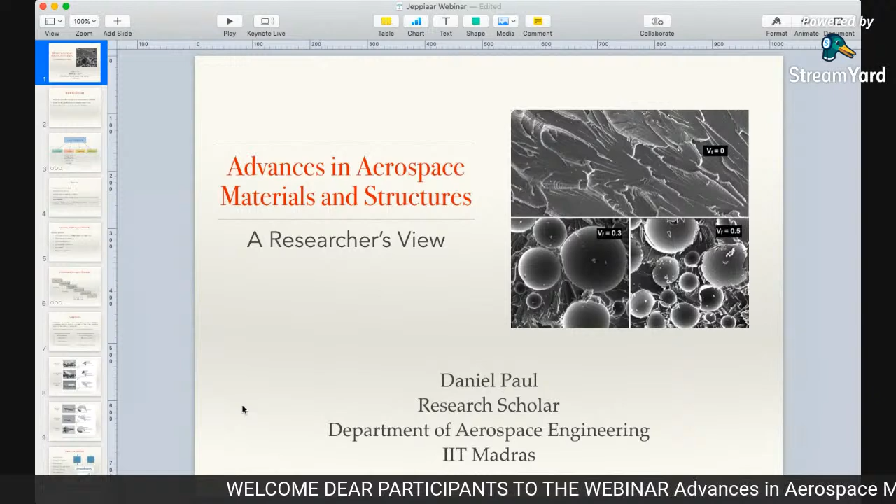I welcome all of you, thank you for taking your time. Today I would like to share a bit about the advances in aerospace materials and structures from a researcher's point of view. So it's not going to be a lot of technical stuff. It's going to be a lot of my experience, which I went through during my PhD, especially to inculcate an interest in research.

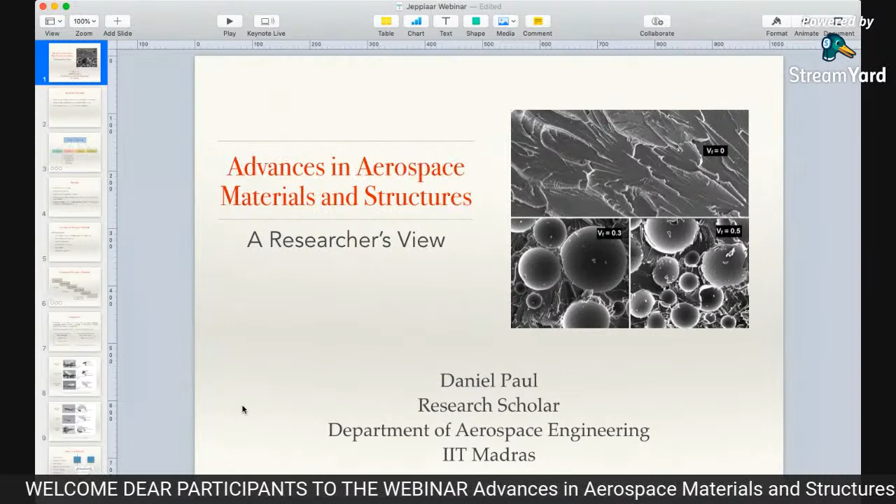As Sir has already introduced, I'm Daniel Paul, a research scholar at the Department of Aerospace Engineering in IIT Madras. The aim of this webinar today will be to provide a brief introduction to aerospace materials and structures. It will be very brief. Many of you might already be knowing about these materials and structures used in aerospace and other applications.

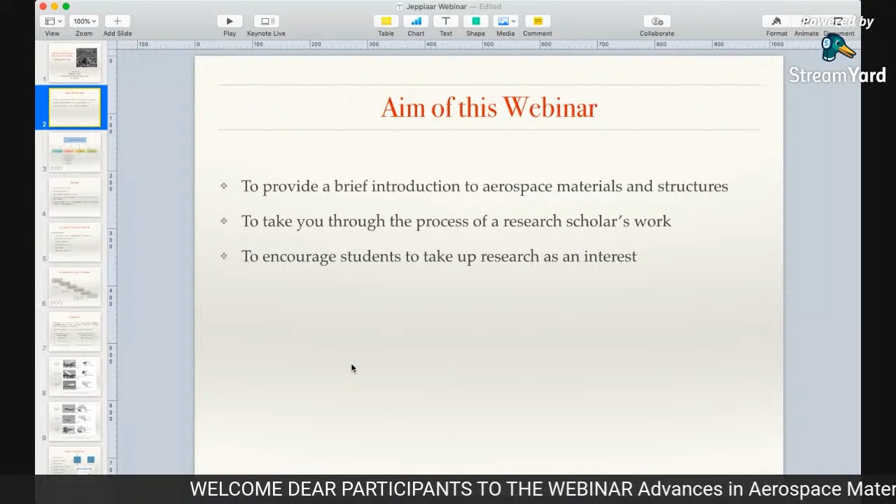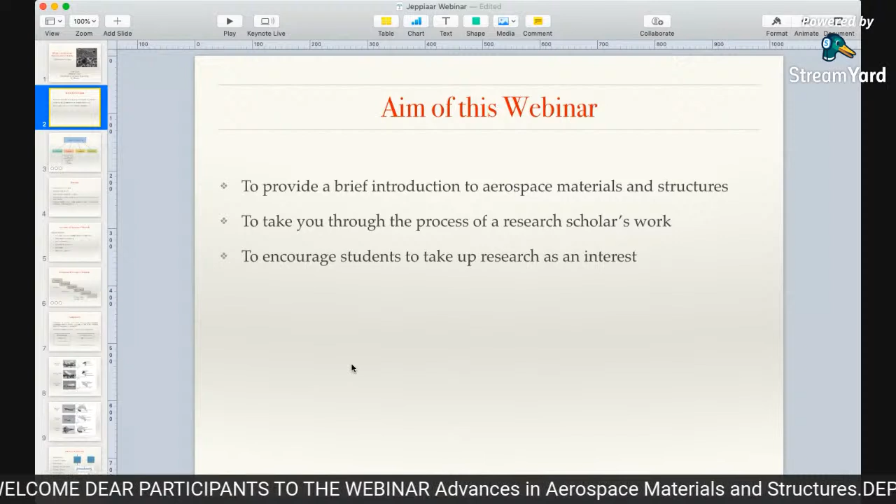The second part is mainly to take you through the process of a research scholar's work, that is, how to approach research and what are the important steps in research. It'll be good if undergraduate or postgraduate students inculcate that now itself. And the third thing is to encourage students to take up research as an interest. It may not be as an academic career, but as an interest, how to take up research in day-to-day, in the daily studies itself.

As we know, even yesterday there was a webinar on shock tubes. Aerospace engineering has several disciplines under it, and three are very major: aerodynamics, structures, and propulsion. Aerodynamics, as you know, deals with the forces on the aircraft when it is in flight. It can be an aircraft, a spacecraft, or any flying object.

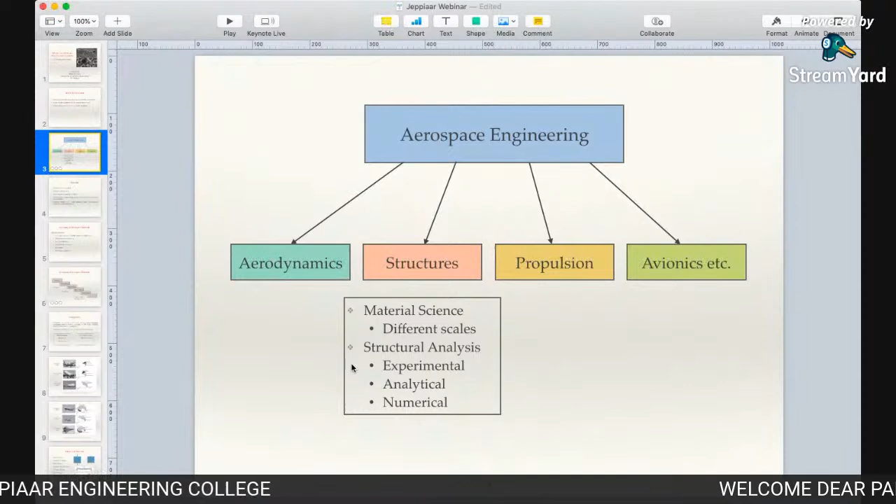Structures deals with the structural design, and what keeps the structure together. And propulsion deals with what powers the aircraft, spacecraft, space shuttle, or any flying object—what is that thrust-providing device. There are other sections of aerospace engineering, such as avionics, but that comes more towards the electronic section. So aerodynamics, structures, and propulsion are the three major pillars of aerospace engineering.

So today we'll be seeing about structures, and in structures there are two main classifications, or two main divisions.

One is material science, and the other is structural analysis. In material science, we deal directly with the material itself. If it is a metal, we deal with the structure of the metal. We deal with what are the constituents. If it's an alloy, we deal with what are the constituents of the alloy and how they react with each other. And there are different scales to it.

We can look at it at a macro scale, which is nothing but how we see objects to the naked eye. We can analyze these materials in a macro scale. It can be in a micro scale, nano scale, all the way down to atomistic scales and atomistic models of different materials.

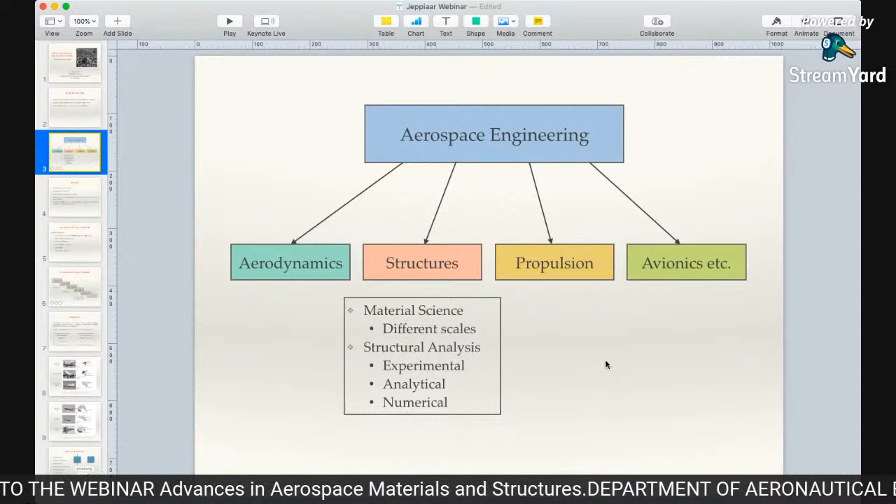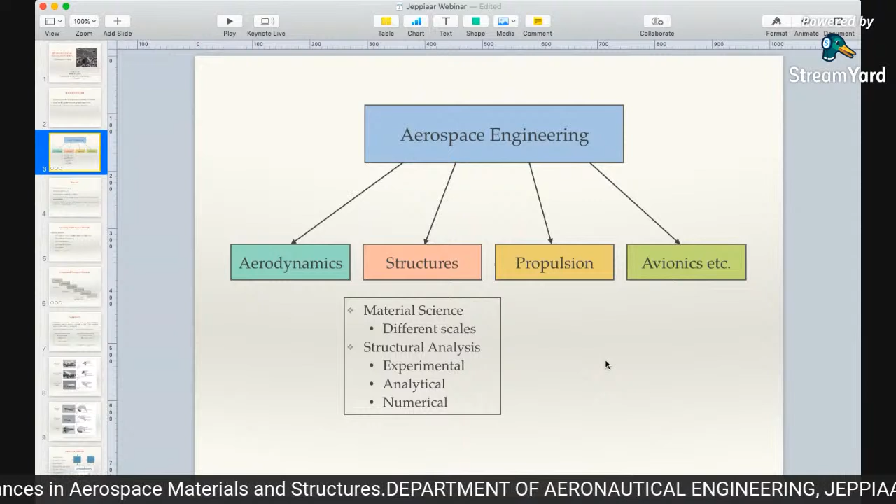And the other is structural analysis. In structural analysis, it deals with the design of the structure, how things are joined together, and what are the shapes which are used in the different load carrying members. Structural analysis can be either through conducting experiments, through analytical models, and also, in recent years, a lot of research is being done on numerical simulations. So we need not actually make a structure and test it physically, but we can run numerical simulations which tell us which is the best possible configuration and which is the optimized structure.

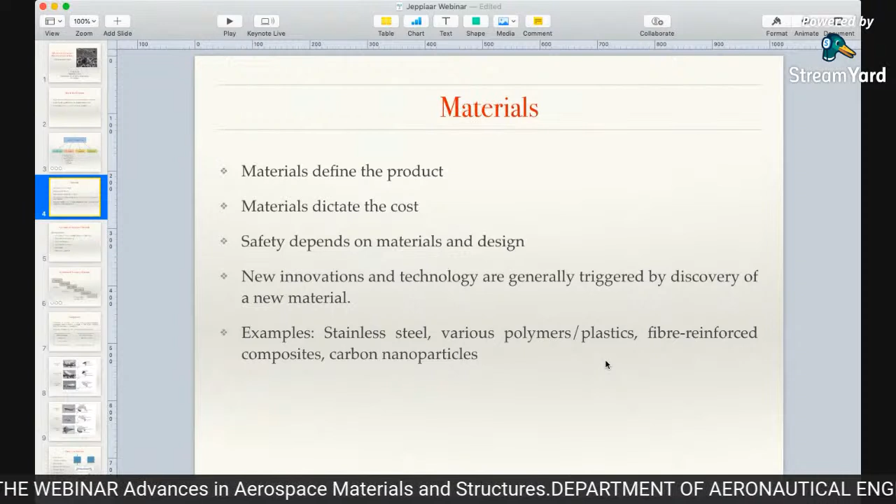Now coming to materials. In general, when we see any product, the first thing that we look for is the material. For example, if we buy a mobile phone or a laptop or any other device, the first thing that we see is what is the material. Is it made of some cheap plastic material, or is it made of some very good material which can withstand stresses if it's dropped? And we see the glass, whether it has some extra coatings to protect the material, protect the product.

So materials define the product. If we take a product, the first thing that we see is the material which it is made out of. And the second thing about materials is that materials dictate the cost. You cannot have a very high performance material at a very low cost. So depending on what is the expected cost, the materials are decided in different structures. That is an important parameter.

But this cannot be done at the expense of safety. Safety is primary, especially in the aerospace industry. Safety is one of the most important parameters, not only in aerospace, in everything, but more in aerospace. Because when an aircraft or a spacecraft is flying, and if something happens because of the material, some material erodes or some damage happens, it can be catastrophic and fatal, completely fatal. So safety depends completely on the materials and design of the structure. Materials need to be chosen very carefully in aerospace industry.

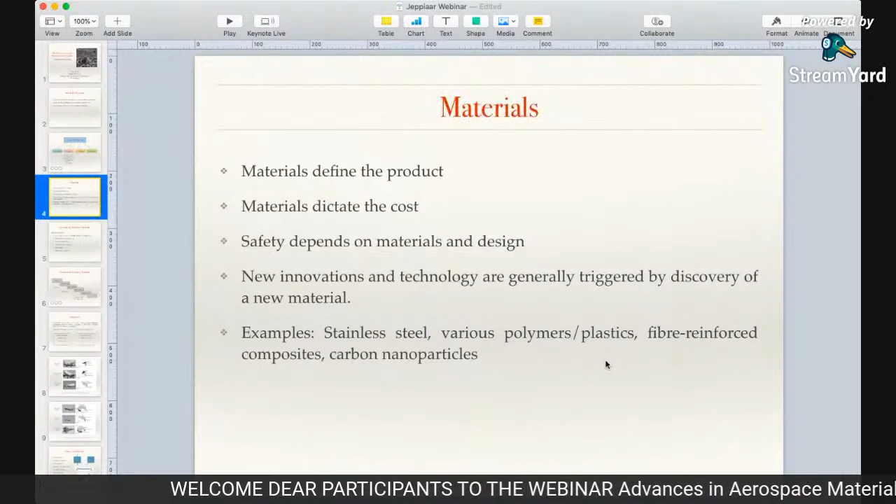And another important fact is that all new innovations and technology are generally triggered by the discovery of some new material or some new way of looking at an existing material. For example, if we see the Industrial Revolution, a lot of metals came into prominence in that time, and that led to a lot of industry development. People could manufacture things very easily. New tools could be made. New industrial equipment could be made very easily because of discovery of how to easily make things with metals.

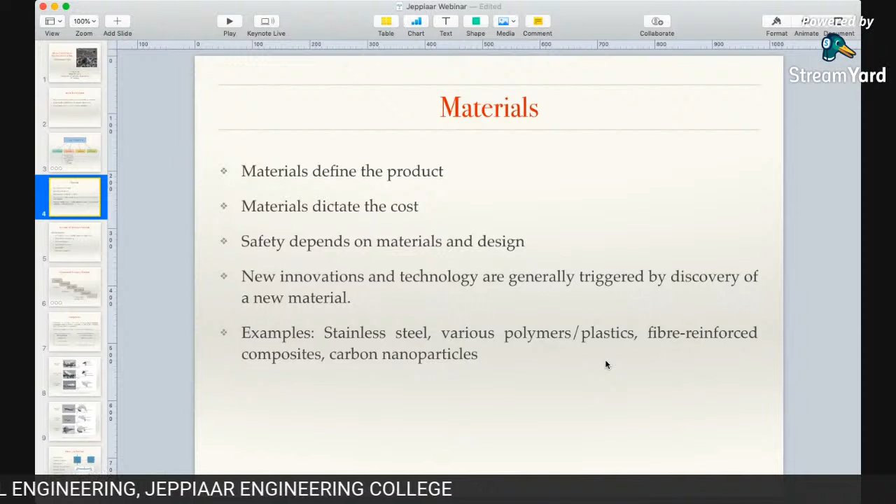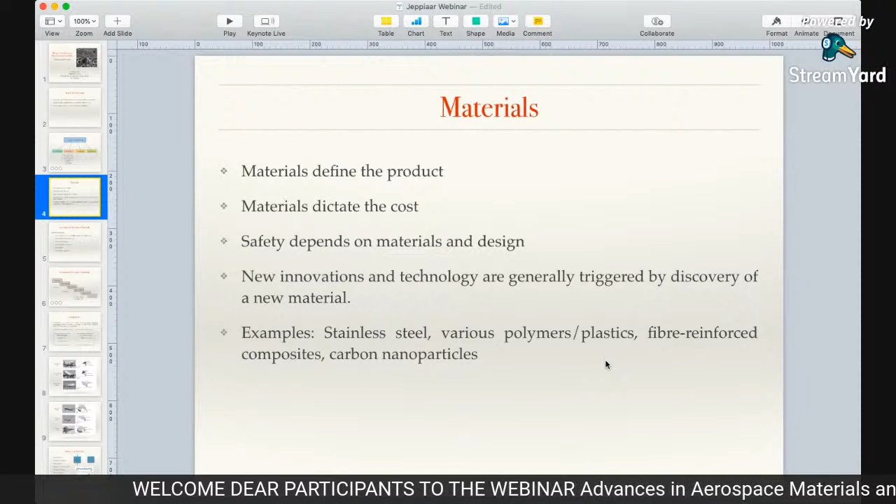Stainless steel and iron, steel, and all these things came into prominence during that time. And various polymers, plastics, which we use today, 50 years back, it would not have been there. And the progress that material has brought is immense. Coming further down, we see composites, advent of composites in the middle 20th century, late 20th century, has been revolutionary in many places. The same way, carbon nanoparticles, nanotubes, nanostructures, nanopowders, all these have been game changing in many different industries. And also, if we see the computer era, it came when they found silicon diodes, and when they found that they could reduce the size of different big integrated chips into smaller ones. So that also was possible only because of the discovery of materials and processing.

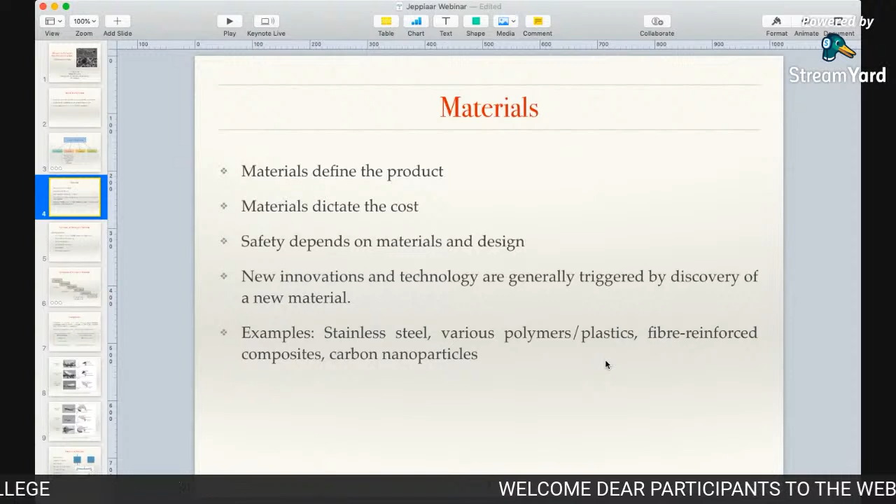So what is so different in aerospace materials, which makes them a level above other materials, other requirements of other industry? The necessary properties of aerospace materials, if we see them, the first thing would be low weight. We never want a bulky object to be flying in space, because to make it fly, we need to supply it more lift or propulsion, and that again leads to more money being put in. So the cost increases rapidly. And at the same time, we cannot compromise on strength or stiffness or any other material mechanical property. So these aerospace materials should have a high strength to weight ratio.

Aerospace materials should have high strength at a low weight, which we generally don't get in metals. If we have a bigger, thicker metal structure, we think it will have more strength, but the aerospace industry needs materials of high strength and low weight.

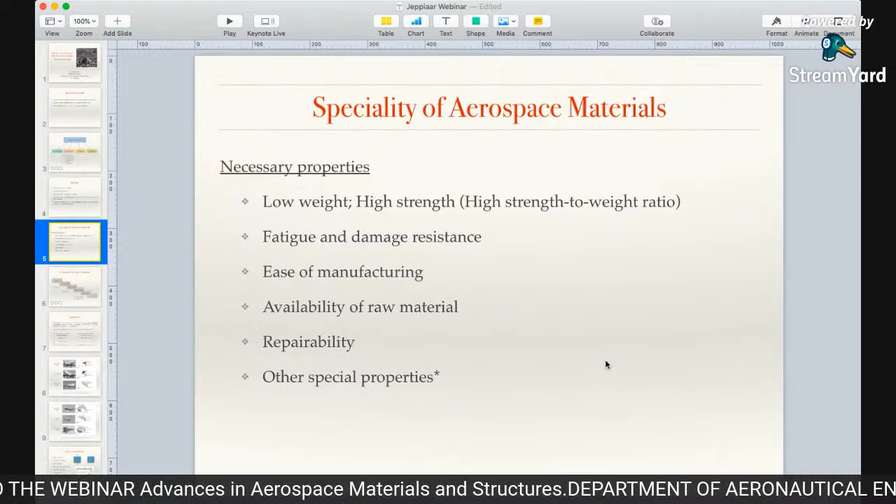Another important parameter in aerospace materials is fatigue and damage resistance. When an aircraft or spacecraft is on the ground, it has no loads other than gravity, so the stresses are very low. But when it is flying through the air, it experiences large aerodynamic forces, drag, and many other extra loads which are very high. So the stresses fluctuate: low on the ground, very high in operation.

This fluctuating cyclic load causes fatigue, which is very dangerous because it develops with time. There may be a small crack at some point which is not visible, but suddenly when it exceeds the fatigue stress, it can catastrophically fail. This is very, very bad in the aerospace industry, so materials that are fatigue and damage resistant are a key requirement.

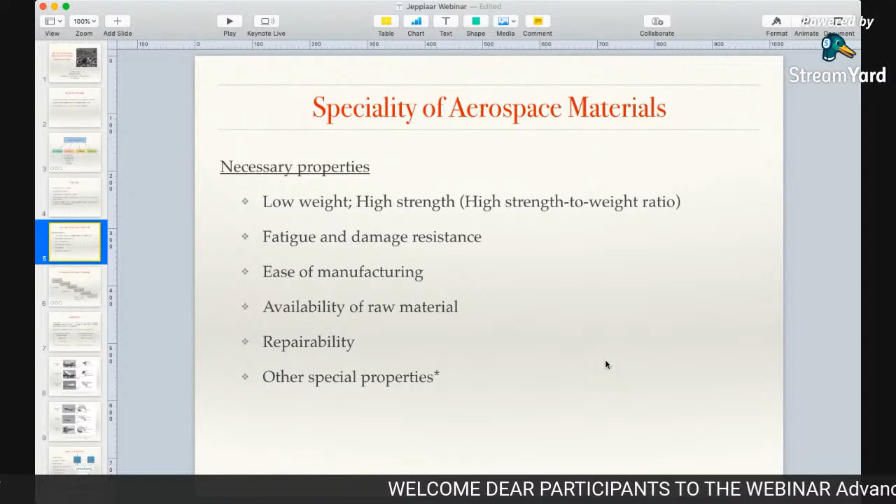Ease of manufacturing and availability of raw material are very important for commercial flight applications. For military or space applications it may not be a problem, but for commercial flights or other applications like drones or unmanned aerial vehicles, ease of manufacturing and raw material availability are very important. Another important factor is repairability.

If a small panel is damaged, that should not hinder us or force us to replace an entire body, structure, or part of the aircraft. So these materials should be easily repairable—if there's a defect, it should be easily fixed and the part can go back into operation.

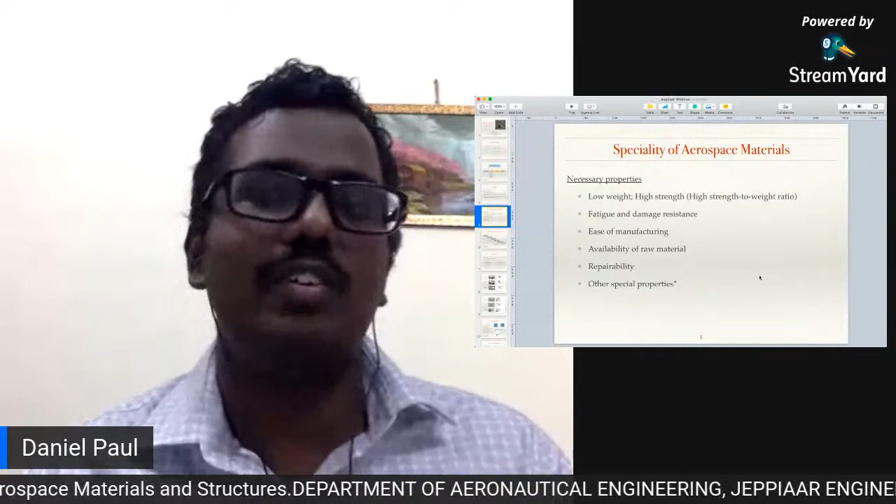There are other special properties too, such as heat resistance. Some materials used in hot areas of engines need to be very resistant to high temperature. Also, spacecraft returning from space hurtle towards earth at very high velocity, generating friction and heat. So heat resistant materials and tiles are very important in the aerospace industry.

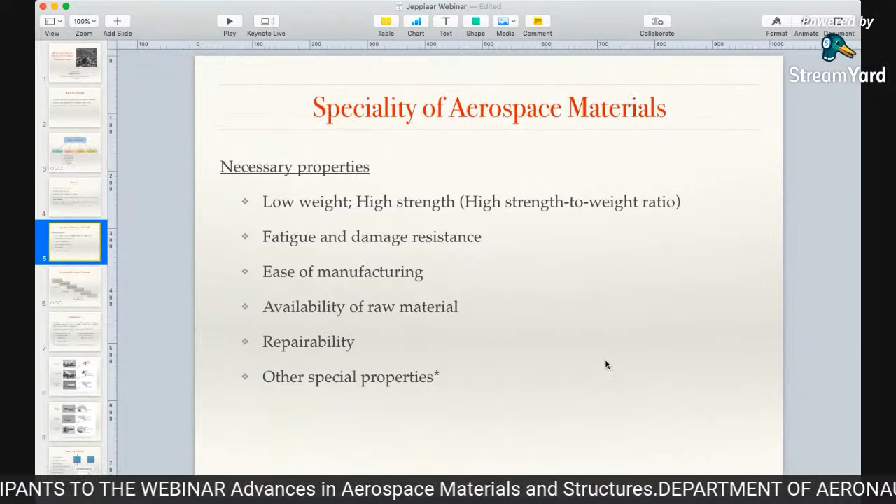Another special property that may be required in certain applications is electrical conductivity or insulation, as needed.

Looking at the evolution of aerospace materials, the first flights towards the late 19th century were basically gliders, not powered flight. Towards the beginning of the 20th century, all aircraft were made of wood or a small amount of metals. The first powered flight in human history, in 1903 by the Wright brothers, was made basically with wood and some reinforcing material.

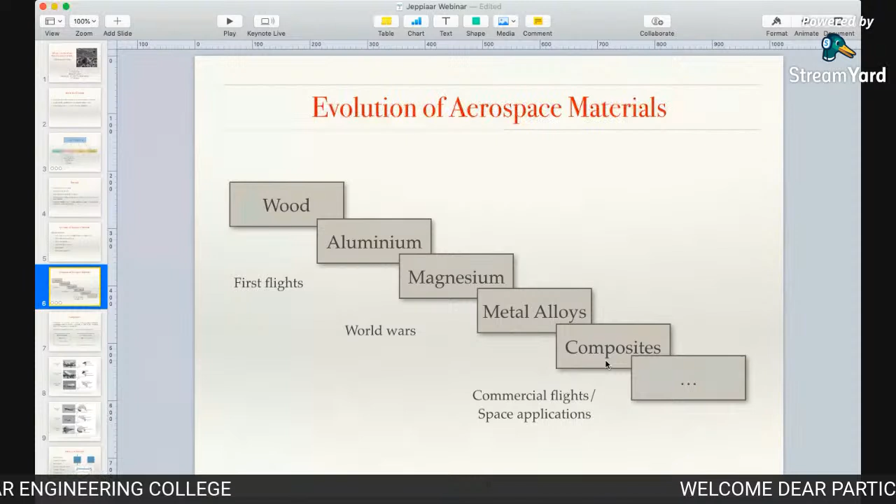Even until the World Wars, in the mid-20th century, wood was still used—there are fighter planes from the World Wars made completely of wood. But then, due to industrial development, we stepped into metals. The main metal found to be light and comparatively cheap was aluminium, and aluminium, magnesium, and even titanium began to be used in some applications during the World Wars.

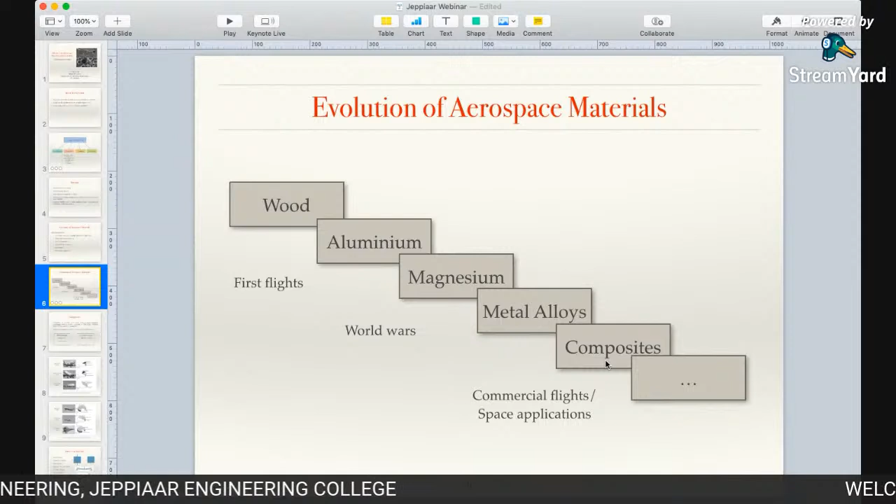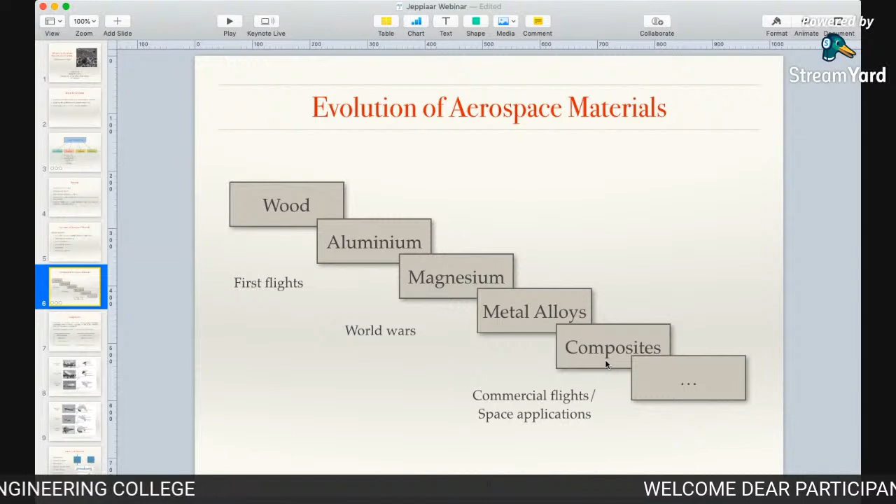Coming to the second half of the 20th century, commercial flights and space applications took off. People started sending spacecraft, rockets, and missiles into space, and for this they needed very strong materials—metals alone could not withstand that much temperature or load. So metal alloys like titanium alloys and aluminum alloys came into use, which led to the discovery of a very important class of materials called composites.

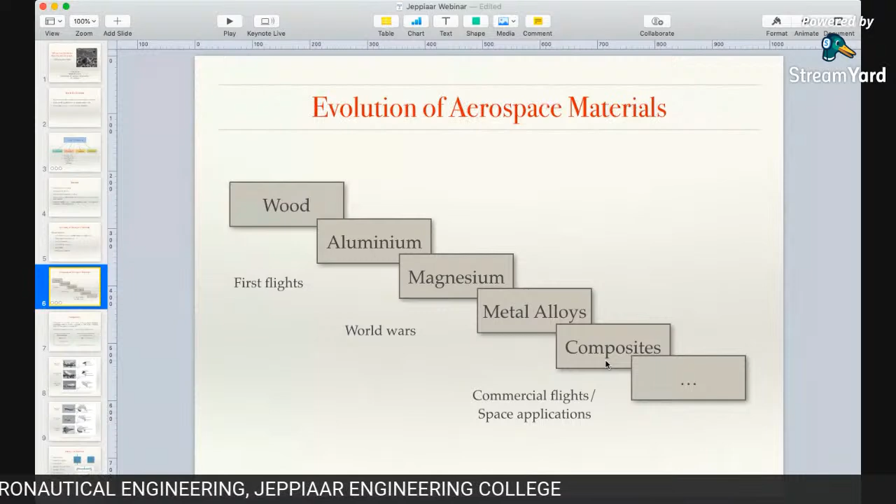Today, most of the talk will encompass composites and not much of metals. So I'd like to take a small diversion from the history and define composites. Most of you would have heard of composites, especially those in second, third, or fourth year of UG or PG. Composites are material systems consisting of two or more individual constituents put together and combined physically, not chemically—that's an important point to note.

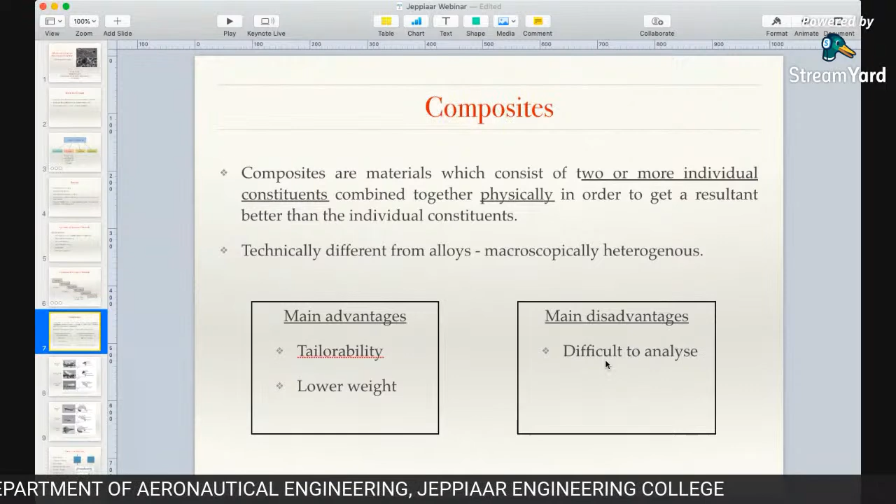This is done in order to get a resultant system which is better than the individual constituents. So you may ask, what is the difference between alloys and composites? Alloys are usually metal-based compounds which are combined at a micro level or even lower. So when we see it at a macro scale, or with the naked eye, it just seems like a homogeneous material. For example, brass or some aluminum alloys.

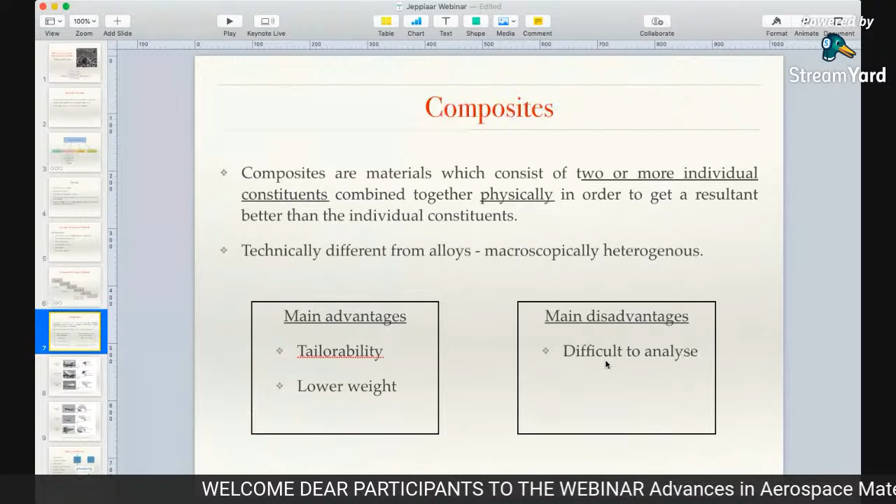But composites, on the other hand, are macroscopically heterogeneous. That is, when we look at it with the naked eye, or if you cut a cross section of it, you can physically see the different constituents. So the constituents don't chemically react completely with each other and form a different phase. The two or more individual constituents are in different phases in composite materials.

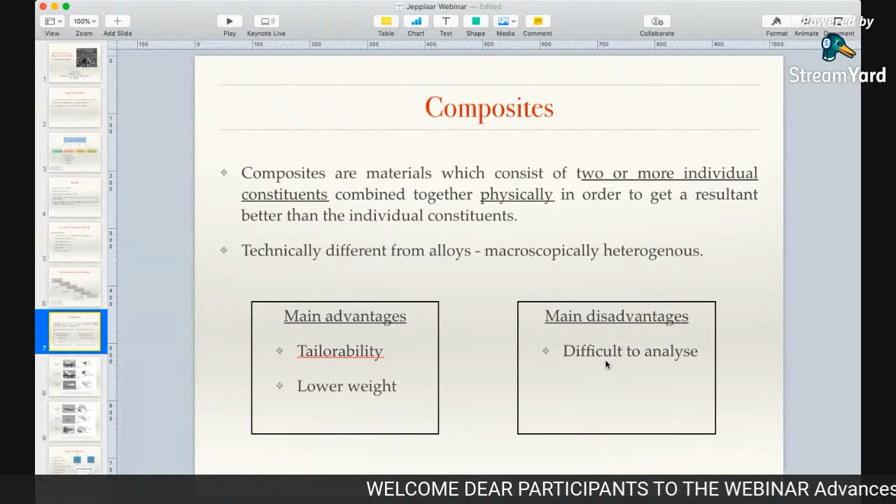So compared to metals, what are the advantages of composites? Composites are easily tailorable. That is, you can change these constituents in their structure, or the way they are put together, or the proportion of different constituents, to give different properties that we need. Also, in general, composites are lower in weight compared to metals. There are some alloys which are very light, but in general, compared to metals and metal alloys, composites have a lower weight.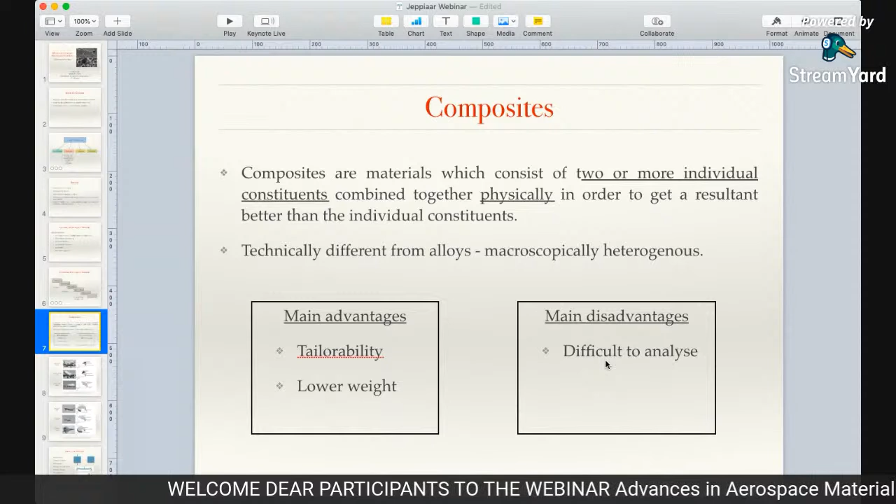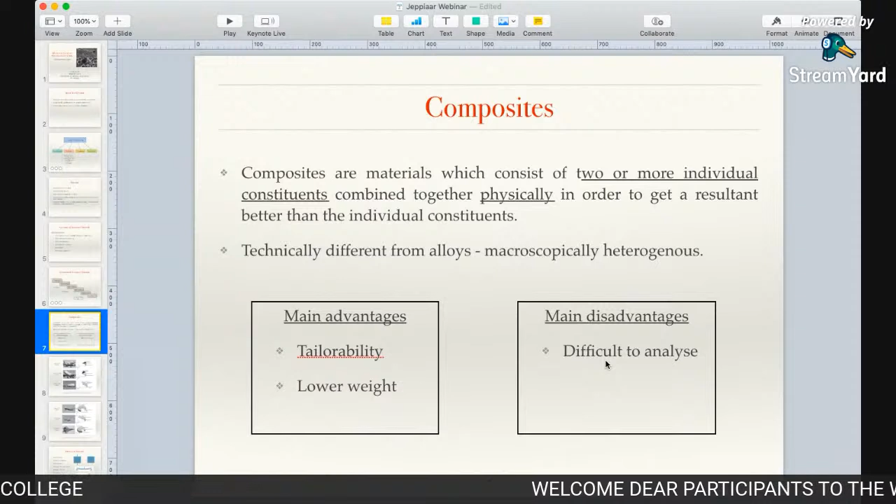A possible disadvantage of composites compared to metals is that it is difficult to analyze - not experimentally, but with analytical models or numerical simulations - because it has more constituents put together and it is not homogeneous. So it requires a bit of mathematics, a lot of analytical models, difficult models, in order to explain composites and understand their behavior without doing experiments. But in recent years, there is a lot of research being done on the numerical simulation of composites.

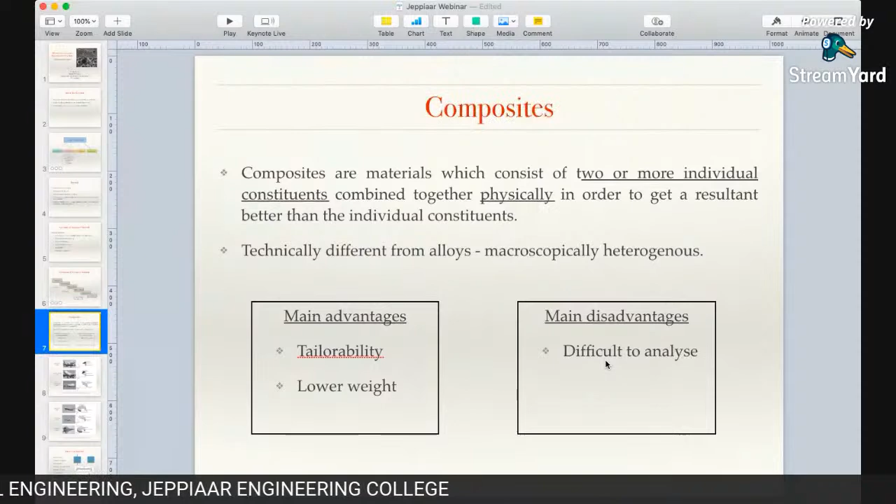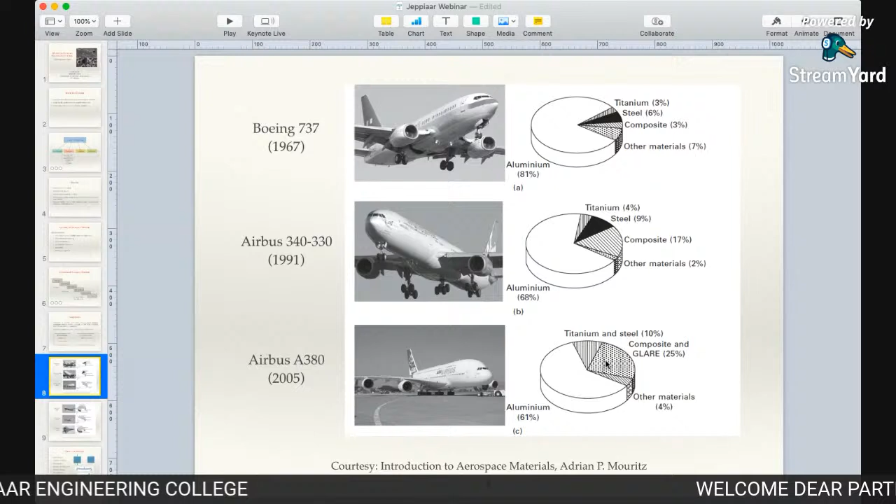Coming back to some trends in history - in this slide, what I want you to notice is the proportions on the right of aluminium and other metals compared with composites. So around 1967, when passenger flights took prominence, the Boeing 737 had around 81% aluminum by weight in its structure and just 3% composites and other metals.

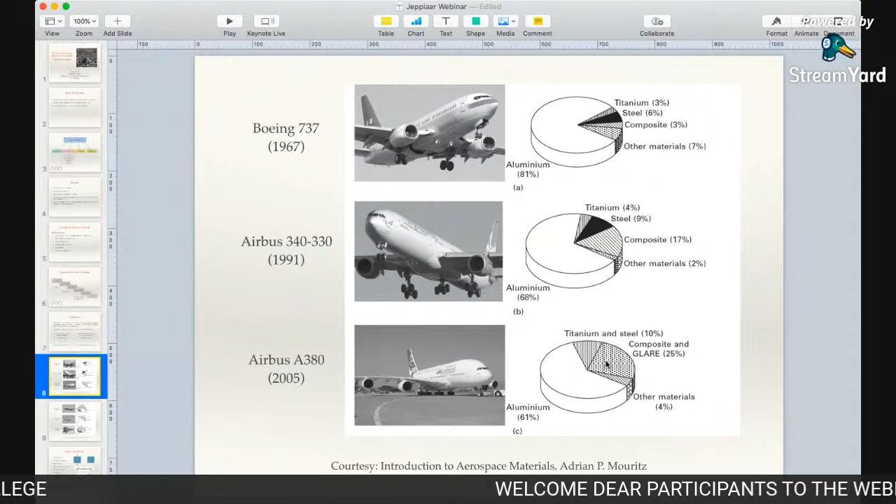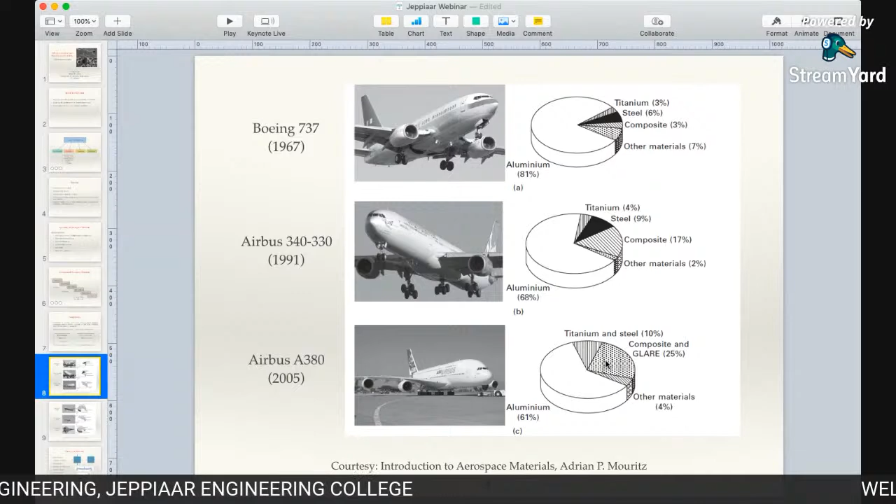Fast forward to 1991, the Airbus 340 had developed its composite proportion, but aluminum was still the major component. Coming down to 2005, composites were around 25% and aluminum around 61%. So composites were being researched on and coming into prominence. But by 2009, just 4 years after the Airbus A380, the Boeing 787 had 50% composite by weight and just 20% aluminum and other materials combined. This was a rapid change in the passenger or commercial flight industry.

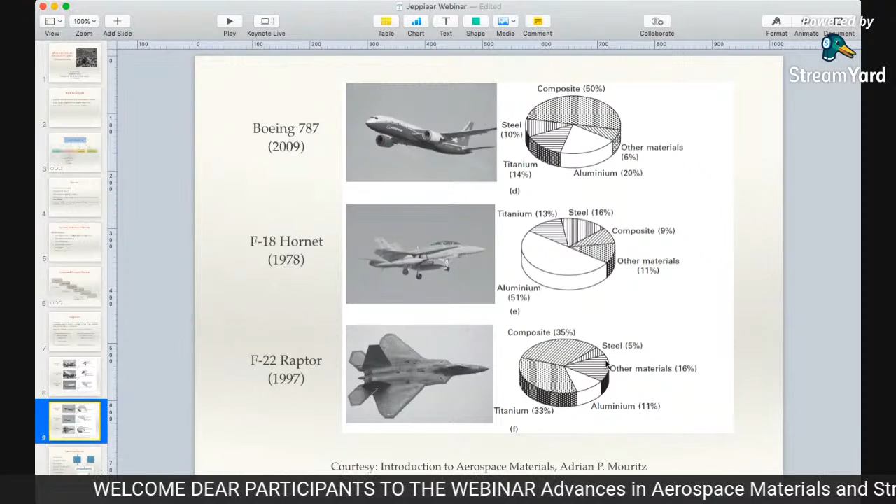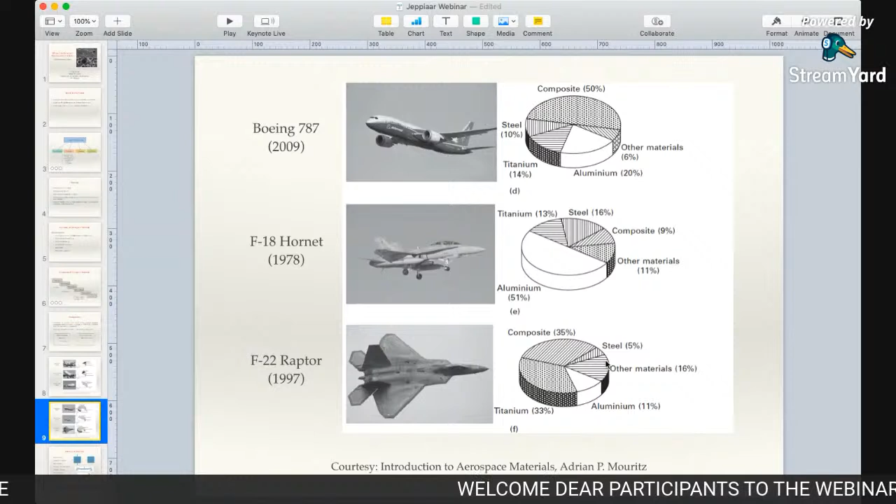In a similar fashion with military aircraft, in 1978 the F-18 Hornet had around 51% aluminum and just 9% composite. Fast forward to 1997, composites are 35%, titanium is 33%, and aluminum is just 11%. This is a drastic change, and it brought forward the advantages of using composites in the aerospace industry.

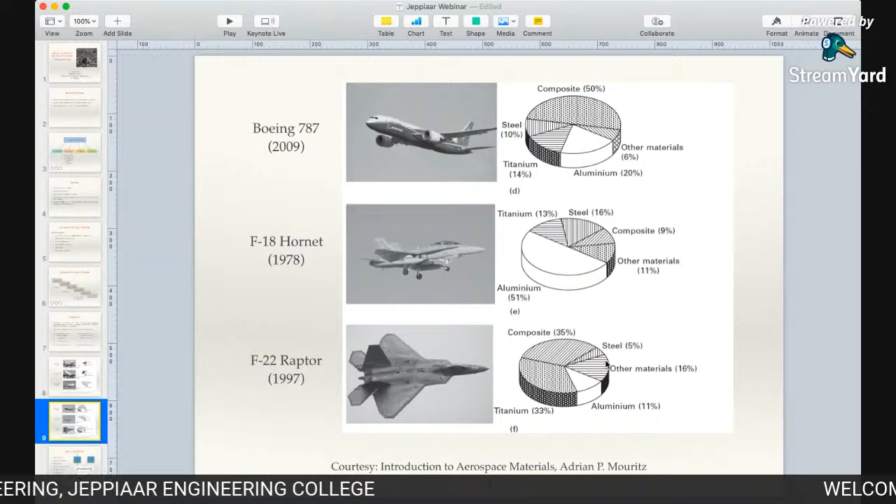So now we've seen the history of materials and what materials are used. I would like to take a small, one-slide look at stresses in materials.

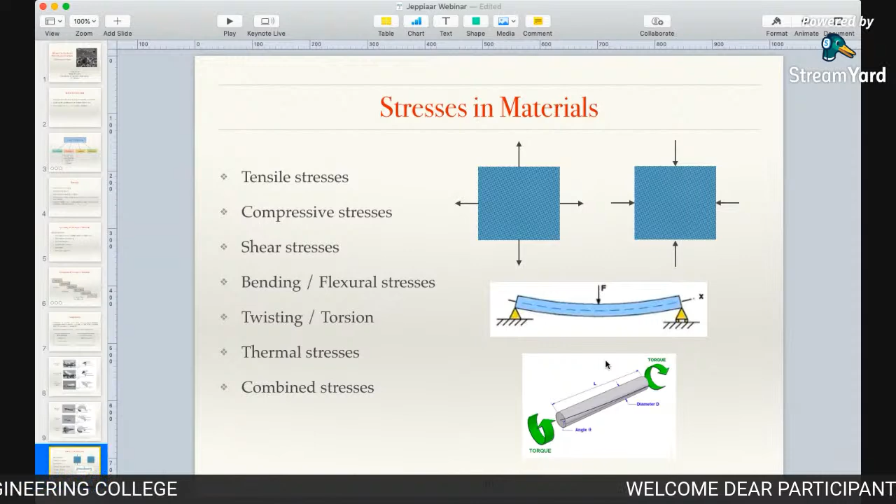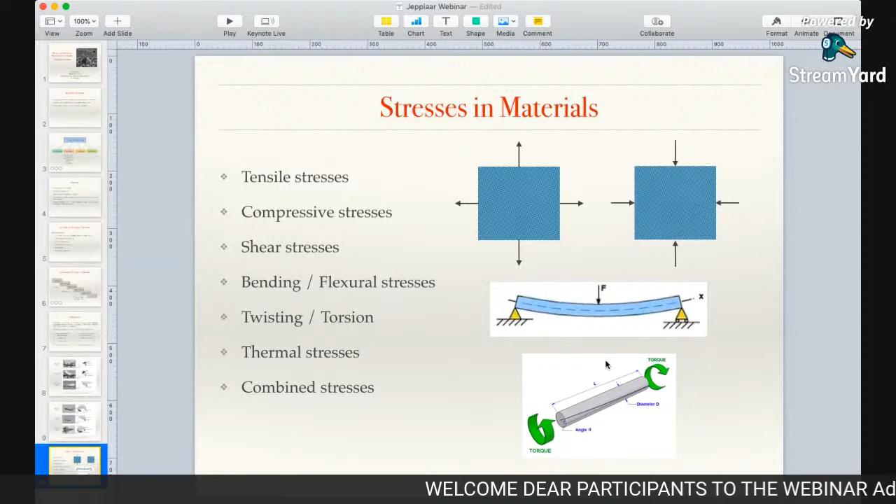When we look at different materials, say steel compared with rubber, we see a lot of differences. If you take a bar of steel and try to press it, it's hardly going to deform - it's just like a rigid material. But when you take a rubber piece, say an eraser, and apply a small force to it, it deforms a large amount. So we can say that steel is hard and rubber is soft.

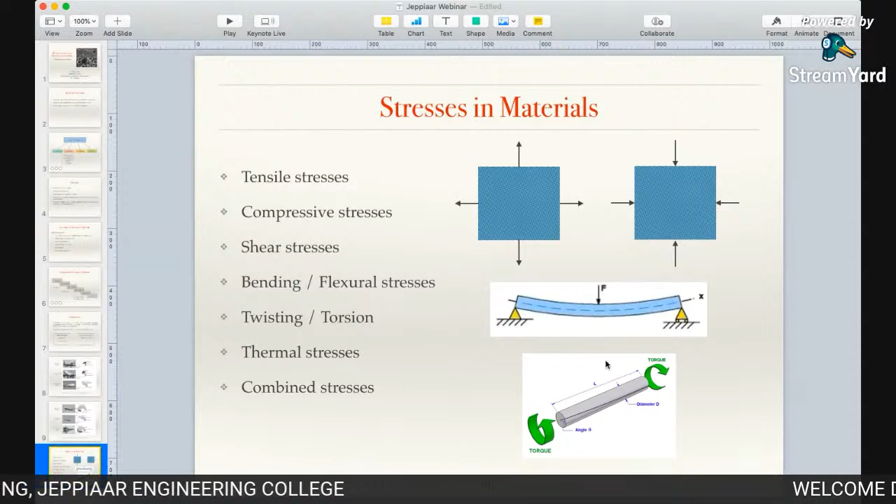Another property difference is that when steel is subjected to a very high load, it can deform, and when we take out the load, it mostly does not regain its original shape - it stays deformed. But when we see rubber, if we apply a load and then take it out, it's going to mostly come back to its original shape.

So why does steel react differently to rubber? What is the difference? The difference is that when we apply a loading or a deformation to a material, each point in the structure reacts to the loading, and this reaction is called stress. So stress is nothing but a reaction to the applied loading - it may be an external loading, internal loading, or many other types of loading.

So stresses are nothing but reactions of the material to a particular external or internal loading. There are different types of stresses, as we can see here.

The first figure on the right shows a tensile stress, which is something like an expansion. If a point in a material experiences tensile stress, that means that small infinitesimal portion of the material is being pulled apart.

Again, we have compressive stresses which compress the material. We have shear stresses, and we have bending which causes flexural stresses. That's the middle diagram here of a beam or a bar bending. We can see that the top half experiences compressive stresses and the bottom half experiences tensile stresses, so this is a combined tensile and compressive loading.

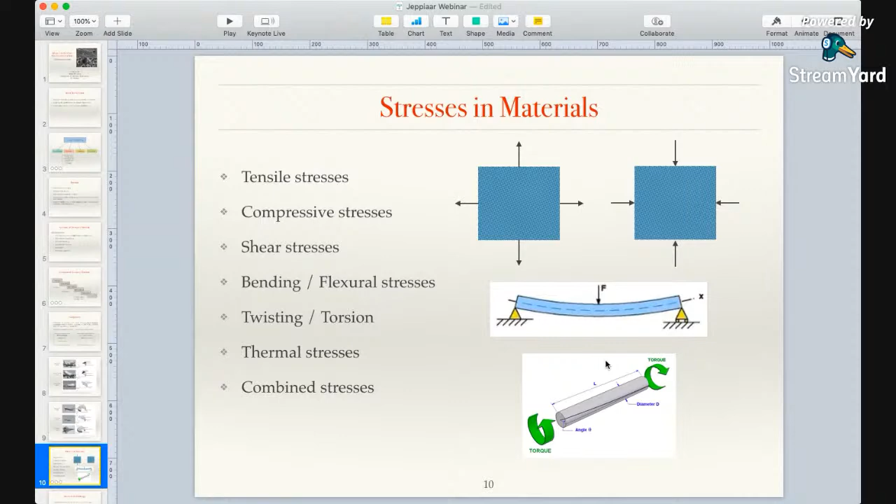In most aerospace applications, or any application, these stresses don't appear individually. In general random loading, you won't usually have tensile stresses alone or compressive stresses alone. Some parts of the structure may have tensile stress, some may have compressive stress or shear stress. So most of the time these stresses are combined in one way or another, and that makes it more difficult to analyze and to find out the exact reaction of the material.

So with this, I would like to move towards the second part of my talk today, which is about researching in aerospace structures.

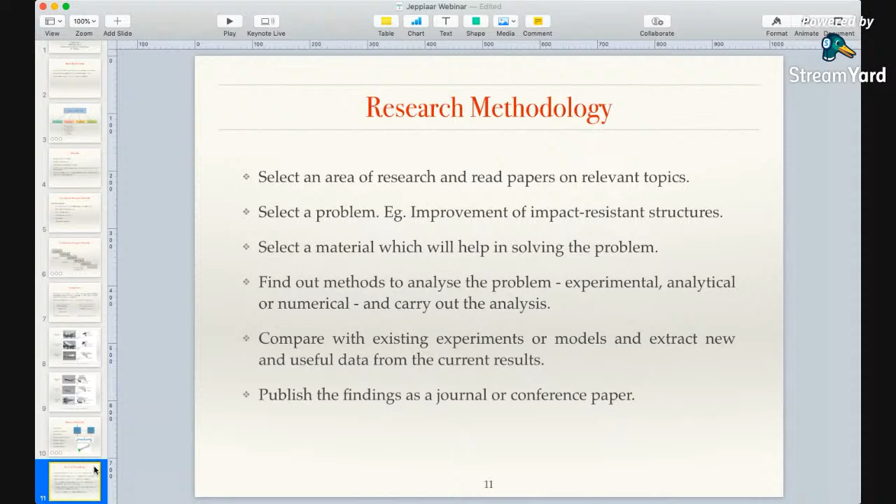This will mostly be my experience in the last 6 years in IIT Madras doing my integrated PhD program. When I went from UG to the integrated PhD program, my knowledge of research was not that high. So I'll tell you the steps that I took to improve my research capabilities, and I'll also go through my research work in brief to show you how to approach a problem, how to select a problem, approach it, and how to solve it and get results.

This is not an ordered list, this research methodology—just some important points to note when stepping into research. The first thing we do is select an area of research. It may be a broad area; in my case, it's composites. When I stepped into my integrated PhD, the topic given to me was composites, which is a very wide range of topics under it.

The first thing you do is not to directly start an experiment or do something, but to read papers on relevant topics under that broad area of research, to know what interests you and to know the current trend in that area.

The next thing would be to select a problem. From the papers you've read, you may think a particular thing can be researched further—there is a research gap in that topic. In my case, the problem I selected was improvement of impact resistant structures. Composites are good in impact resistance, but my aim was to find ways to improve the impact resistance of certain composite structures.

The next thing would be to select a material which will help solve the problem. From this point onwards, I will explain in the next few slides with examples how I selected a material and carried out the different steps in research.

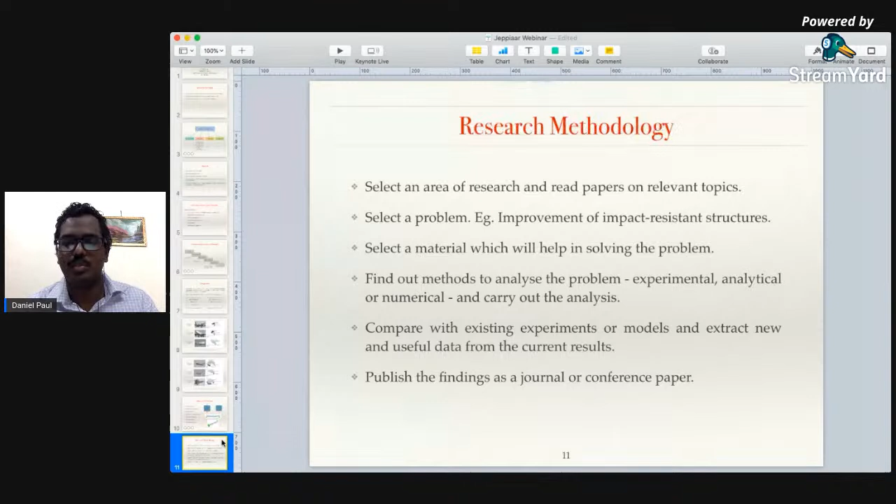So my broad area of research was composite material. As I've already introduced, composite materials' constituents can be broken down into two major parts.

The first thing is the matrix. The matrix is what gives shape to the composite material. It is a base which gives shape and structure to the composite material, and it also holds the other constituents together. Without the matrix, the other constituents would just fall apart. It holds them together, and when you apply a loading, it transfers the load equally to all the reinforcement or additives which are added to the composite material.

The second part of the constituents will be the reinforcement. I prefer to call it additive because reinforcement mainly means strength reinforcement. When we say additive, it doesn't always mean strength. It can mean something added to the matrix which improves a particular property, whether strength, electrical conductivity, or even making it opaque or transparent. So whatever is added to improve a particular property of the matrix is called the additive.

In nature, there are many naturally occurring composite materials around us, and in us. When we see nature, we can see things like wood. Wood is nothing but two components put together: it has cellulose, which is a polymer and an additive in this case, present in something called lignin, which is a matrix that holds the cellulose together. By itself, cellulose is simply like a powder, but when held together by lignin, it gives wood, and you know how strong wood is.

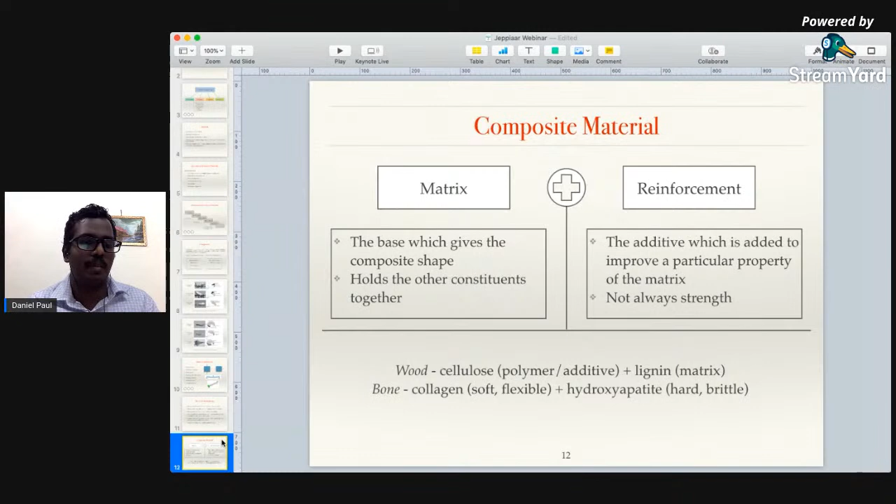As humans, we have always replicated nature, so we have also tried making composite materials on our own. Composites in this way can be classified into many types. This is not an exhaustive list, just some of the more important composites which I have noted down here.

Based on the matrix, we can have polymer matrix composites, ceramic matrix composites, and metal matrix composites. Polymer matrix composites are very widely studied and used in structural applications. Metal matrix and ceramic matrix composites are used in special applications.

Based on the additive, we can add fibers to the matrix. Fibers are nothing but long, thin strands of any material. It may be glass, carbon, or some polymers drawn into very fine strands. We also have natural fibers like jute and hemp. All these form fiber reinforced composites.

We can also have particle reinforced composites. These can be something like rubber, which is toughened by adding tougher particles, some ceramics or something like that. So particle reinforced composites are also widely used.

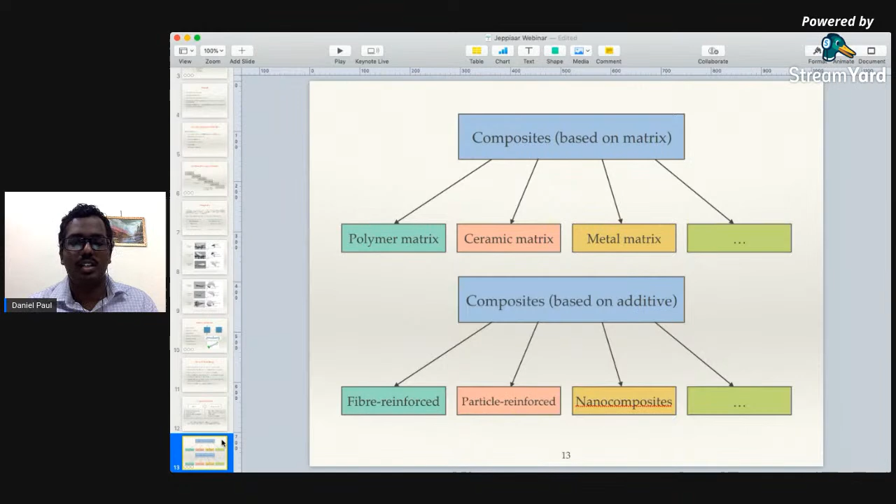Nano composites are coming into the forefront in recent years because of their electrical conductivity and high strength. Nano composites, which are a matrix to which some kind of nanoparticles have been added, are also being used in the composite industry as of now.

So composites is the general area of study which I chose, and my problem was based on impact of structures. A little bit about impact: as you know, impact is nothing but any loading which takes place in a very short interval of time, it can be a few microseconds or even less, with a huge load acting on the material in a very, very short time.

This can be of many types. It can be due to crashes, car crashes, or crashes of two or more huge materials. It can also be due to blast waves. Blast waves are similar to crashes, but in crashes physically two bodies hit each other, while in blasts, shock waves from the blast impinge on some structure and damage it.

We also have ballistic impact, which is nothing but a very small sized object hitting another body at a very high velocity. It can be something like a bullet hit, or if we think about satellites in space moving at thousands of kilometers per hour, it can be some space debris or particles hitting these satellites. The particles may be some millimeters in size, like dust, but when it impacts the satellites at hypervelocity, it can cause extensive damage.

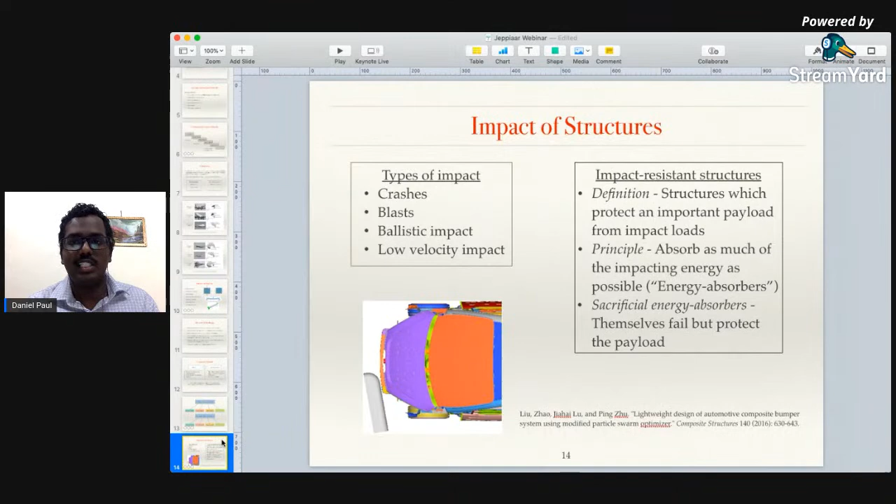You can also have, for ballistic impact, protection for military personnel from bullet impact. We can also have protective jackets which protect an individual from shrapnel, from some kind of debris from a blast, or from direct bullet hits. So these are some examples of sacrificial impact resistant structures. Once they are used, they cannot be used again. They just fail, but they protect the payload, which is the more important part.

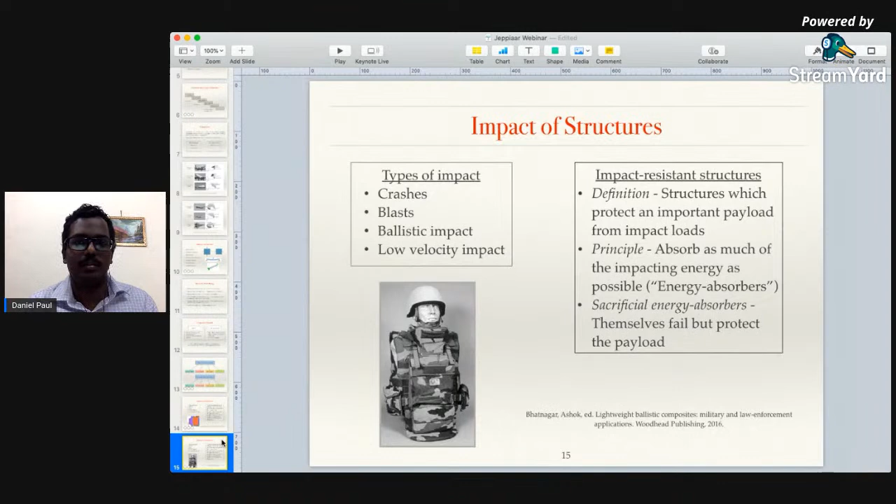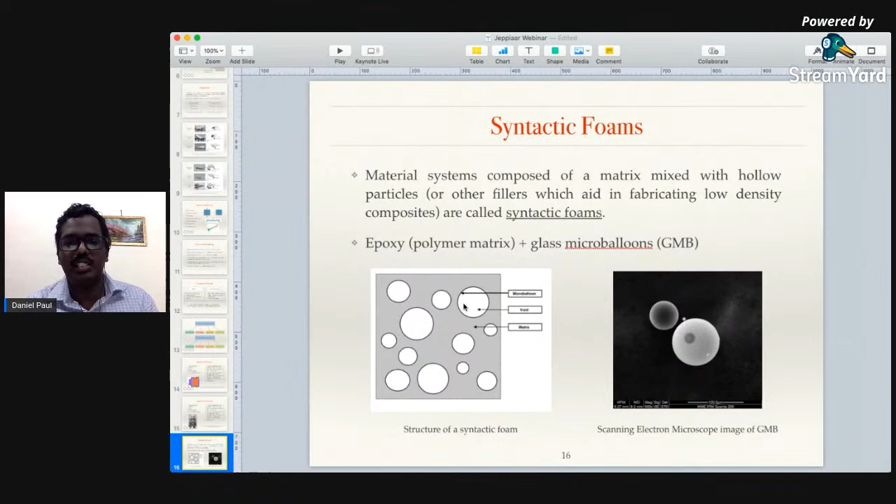I will briefly tell about two main works that I did in my PhD. The first type of impact we studied was crashes or blasts - the crash worthiness of composite tubes. Here, the structure is a composite tube subjected to a loading, that is longitudinal crushing. So in the longitudinal axis, we studied the crushing of these tubes, and the aim is to improve the crash worthiness.

Crash worthiness is nothing but, if a car is coming into the market, they test whether it is worthy of withstanding some kind of crash or energy impact on it. So improving the crash worthiness or energy absorption characteristics of these composite tubes was the first work we did, and it was published in Thin Walled Structures, a journal.

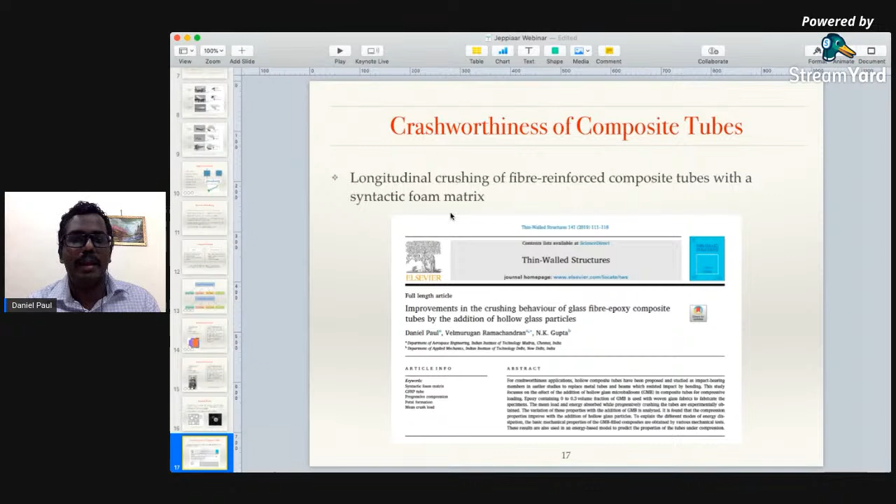What we did was fabricate these composite tubes using glass fiber and epoxy matrix, which is a normal GFRP composite, as they call it, and we made tubes. Instead of just using epoxy as a matrix, we used these syntactic foams as a matrix - we added glass microballoons along with epoxy in these tubes, so they stay hollow.

They don't get filled inside; they stay hollow, but they're filled within themselves with these glass microballoons, and then we subjected them to crushing loads, to compression.

On compression, we found that tubes fail in a progressive manner. They don't fail catastrophically. If you take a bar of composite and compress it, it's going to shear off and fail catastrophically, with no warning.

It's just going to break off at an instant. But when we compress these tubes, it gives rise to petal kind of formations. The walls split and bend inwards and outwards, giving a petal formation, which aids in progressive failure. So when you deform something progressively, you're elongating the time of compression, and this leads to higher energy absorption.

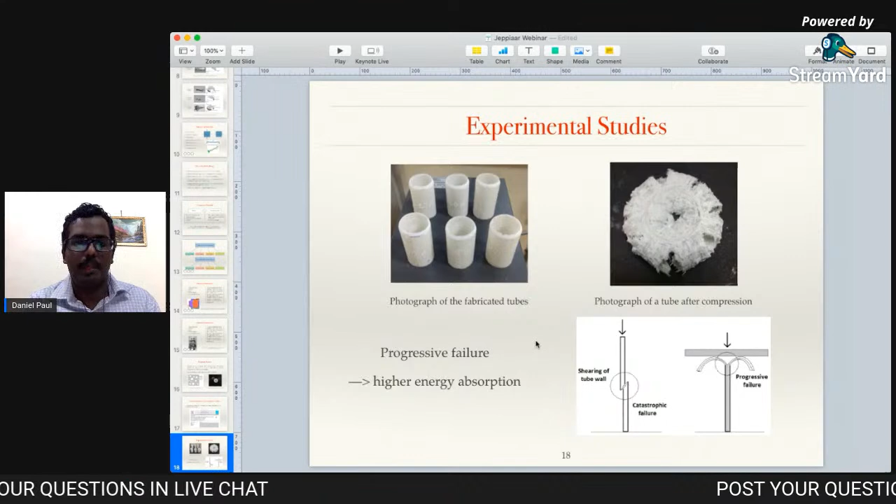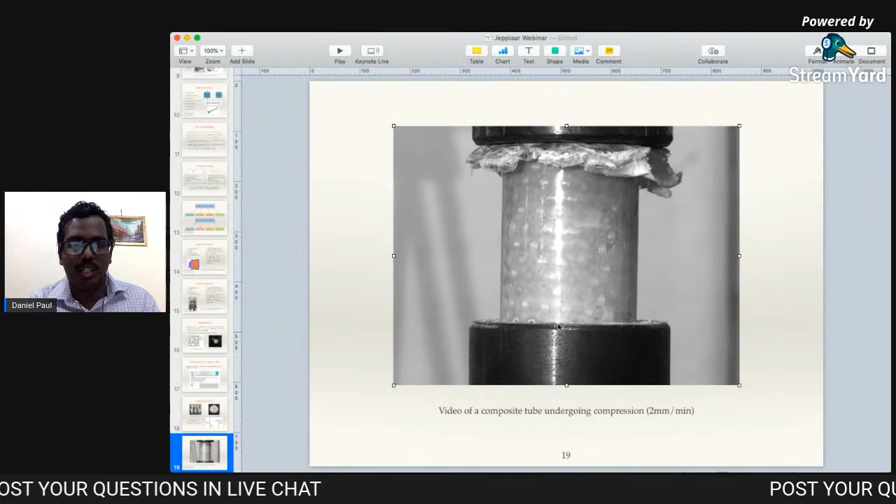I have a video of this. I don't know how nicely it will stream on the YouTube channel link, but I'll play this, and if it plays properly, you'll be able to see the bottom plate compressing this tube, and you can see these petals forming, and then they break off after some time.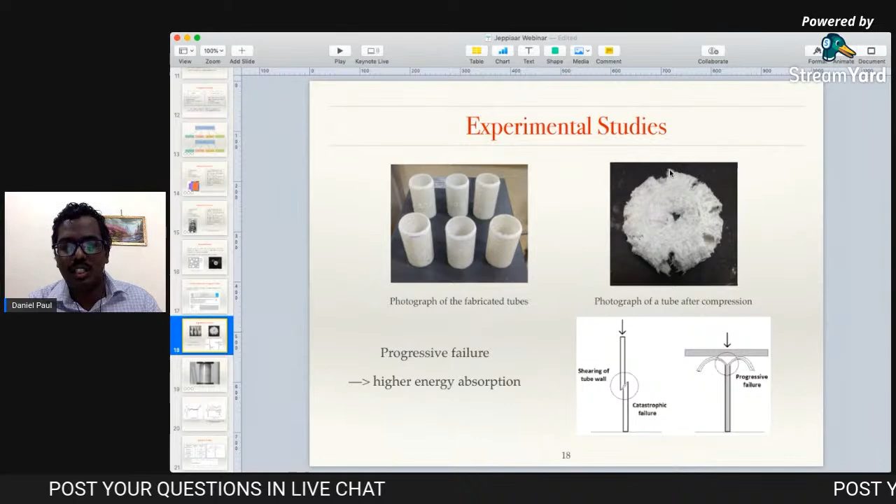Axial cracking is nothing but these cracks formed in the longitudinal direction. Because of this cracking, there is some energy absorbed due to petal bending and interlaminar shear in the petals, and also due to friction between the crushing plate and the composite. Because of all these things, some amount of energy is absorbed for each crush cycle, for each crush length.

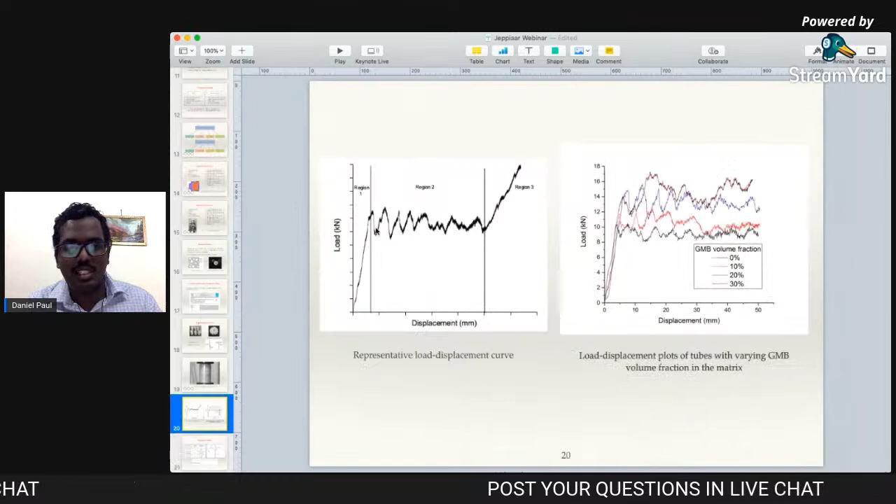What we can do is equate the input energy, that is the external work done, with the sum of all these energy absorption terms, and then by rearranging these terms and simplifying the equation, we can find the mean load which the structure experiences during one particular crush cycle. This is the same as the mean crush load in the plateau region.

So by using this analytical model, the energy-based model, we can find out the mean crush load, and also subsequently find out the energy absorbed by the structure analytically, without actually performing the compression test.

To get these basic mechanical properties, we take a normal composite plate made of the same material and test it for normal mechanical loading such as tensile loading, flexural, shear, as well as fracture toughness. These are the different parameters we found from experiments, and when you plug them into this equation, we can get the mean crush load and energy absorbed by the structure.

So for different materials, these terms are going to be different, and the mean crush load is going to be different.

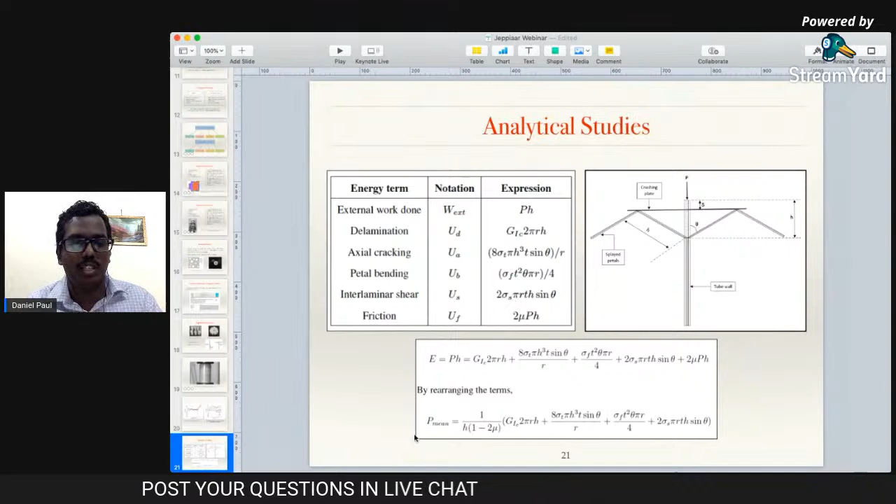These are some of the results that we have published. This first table shows the numerics involved. As we see, when we increase the volume fraction of the glass microballoons or hollow particles, the density decreases rapidly from around 1.6 gram per centimeter cube to 1.3 grams per centimeter cube. The mean crush load, as we saw earlier in the graph, increases from around 8.87 kilonewton to 14 kilonewton.

Because these densities are different, to compare materials of different densities, we have a term called specific energy absorbed. The specific property, as we saw, is the property itself divided by either the density or the weight of the structure. In this case, we have divided the energy absorbed by the weight of the structure, and we find an increase in the energy absorbed.

When we see the experimental and analytical comparison, we see that the analytical values are almost comparable to the experimental values. An application of these tubes can be to mitigate blast effect on important structures such as bunkers, such as some important chambers.

We can use these tubes, which are longitudinally placed in this fashion in a pattern, with a plate above it. So when the blast waves, the blast pressure hits the structure, these tubes are going to fail and absorb all the energy, and they protect the important payload or structure underneath.

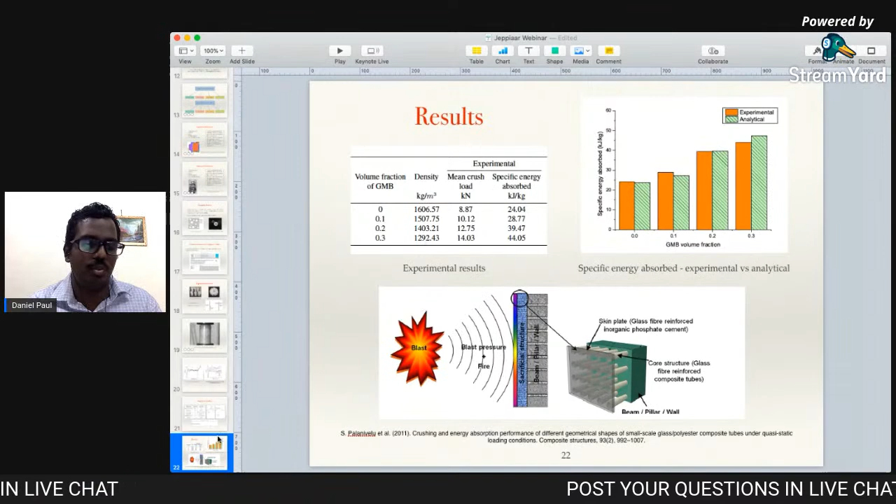So this was about the crashworthiness of composite structures, in particular composite tubes. Another brief thing I would like to say is the second part of our research, which is the ballistic impact of sandwich panels.

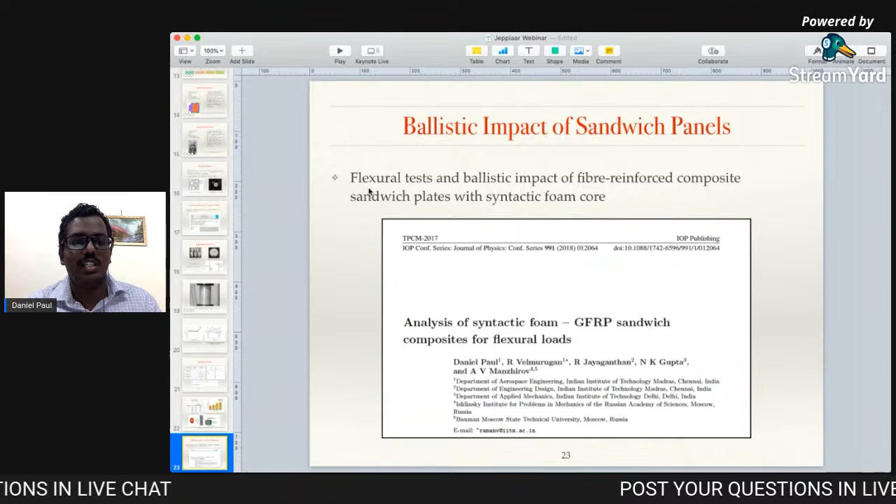In this, what we did is we tested some sandwich panels containing the core material, made up of these syntactic foams, and the skin, made up of normal GFRP or glass fiber reinforced polymer composites. The skin had bidirectional glass fibers and commercially available epoxy, while the core was made of epoxy and hollow glass particles, as we saw earlier.

In the manufacturing of this, we also wanted to increase the energy absorption of this particular combination or structure. So what we did is, in our case, both the core and the skin are composed of the same matrix, which is epoxy. This is nice because we can co-cure this.

So it's not like we make the skin separately, the core separately, and then join them together using an adhesive. Instead, we make the bottom layer, wait for some time till it gels, make the core, and then before the core gels or cures completely, we make the top skin. It's a co-cured method in which the entire composite cures at the same time, and we were hoping to increase the energy absorption of this material.

And this is the setup that we use, the flexural setup, which is a 3-point bending setup in which there are 2 supporting pins and 1 pin which applies the load and causes the bending.

And this is the ballistic impact setup which we had used, in which we can see a similar sandwich plate, which is held in place to a rectangular frame using C clamps. And this in the middle is the metal projectile that we used to impact these sandwich plates and to find out how they behaved.

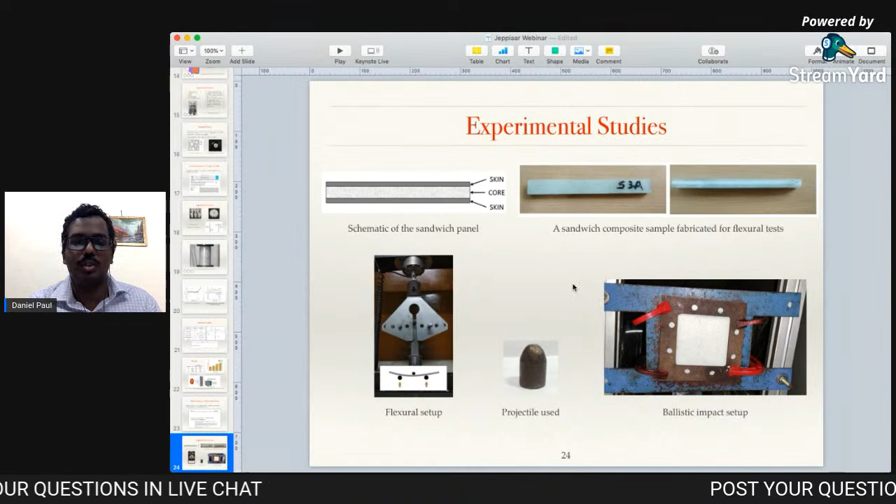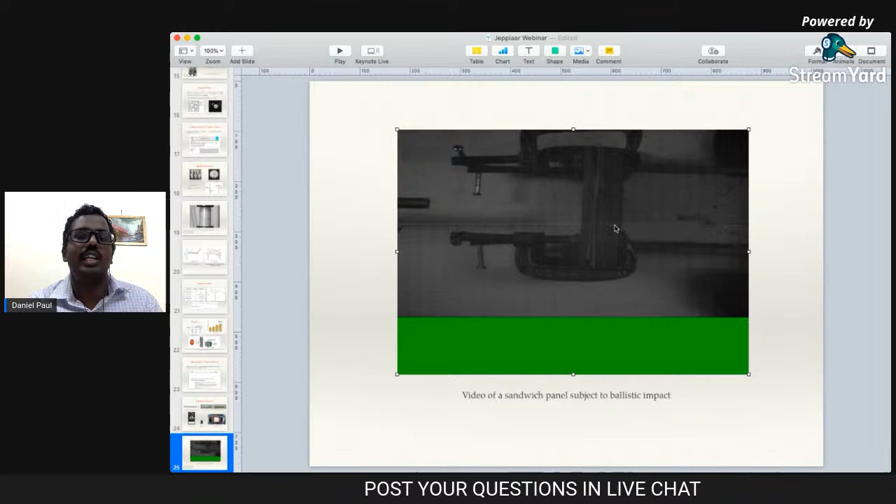So when we see the projectile approaches the sandwich plate at a velocity, some of the energy gets absorbed by the plate, and in this case, it has penetrated through the plate completely and goes out with a reduced velocity. In some cases, if the plate is strong enough, it can cause rebounding of the projectile also. I'm not going to go into the numeric results of this one, just a graphical result page here.

And this happened initially itself, but because of the co-curing method, we have delayed the skin core debonding, which causes complete failure. And so in our case, what happened is we had core cracking first, and then fiber failure, and then we had skin core debonding.

So this again, as we saw in the load displacement graph, increased the area under the load displacement graph and caused a higher energy absorption capacity for this particular co-cured composite.

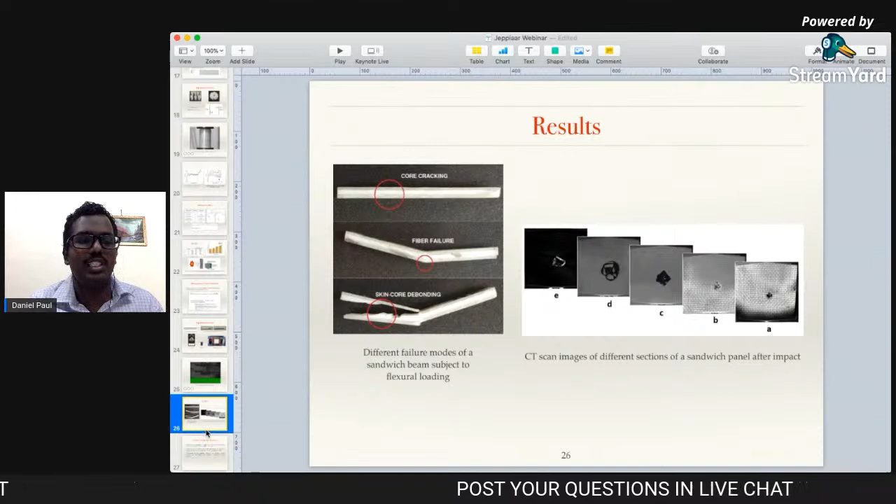So yeah, so this was about how I approached my research and how I chose a broad area and then narrowed it down to a particular problem, and how we went about in solving different things in the problem, and how we improved the material in some way so that we could get a higher energy absorption capacity in the material in different structures, in tubes as well as sandwich plates.

So for those of you who are in your undergraduate third year, fourth year, or even earlier than that, possible areas for research, possible avenues or possible ways, steps you can take for research in structures, in aerospace structures are...

You can look into the behavior of new materials. So the materials can be new. You can take a base material and you can add some new material, or you can change the composition, or you can change some property of a material, like heat it for a longer time and then add it, or some kind of difference in the material or the manufacturing process.

And you can use existing test methods and you can analyze these materials either experimentally, or you can do it analytically also. Some examples in current research trends are shape memory polymers, which are widely being analyzed.

Even in our lab, we have research being done in shape memory polymers, and these are used for things like automatically shape changing wings of aircraft and spacecraft. So we need not have separate control surfaces. The entire wing can change its shape as required on application of certain external stimuli.

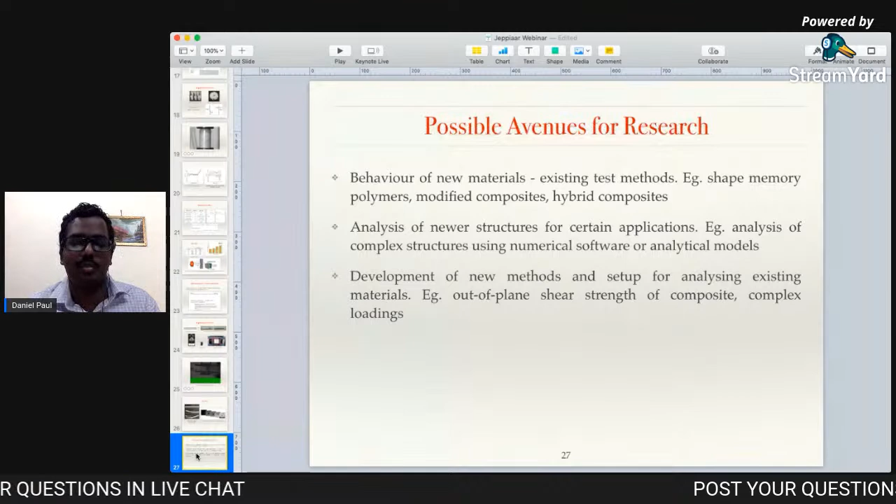That brings me to the end of my talk, and my acknowledgements to the head of my lab and my PhD guide, Professor R. Velmurugan, in whose guidance I have done all this research. Professor R. Velmurugan is a senior professor in the Department of Aerospace Composite Lab, IIT Madras, which is very near for those of you who are in Jeppiaar or in Chennai.

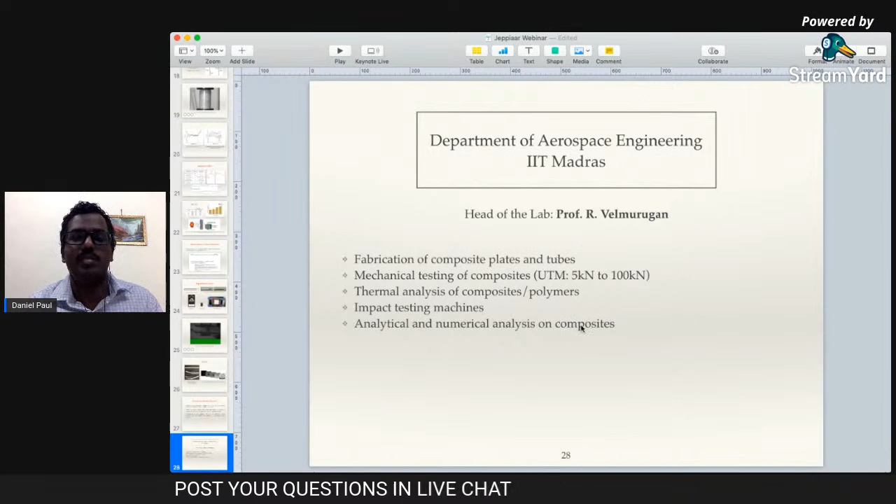In our lab, we do various things like fabrication of composite plates, tubes, and other structures, mechanical testing of these composites, normal static testing, as well as fatigue testing. We have testing machines from 5 kilonewton to 100 kilonewton capacity. We also do thermal analysis of composite polymers, such as differential scanning calorimetry, and we have a dynamic mechanical analyzer for thermal analysis of composites. We are specialized in impact testing machines, like a gas gun which can fire projectiles currently up to 400-450 meters per second, and it's expected to develop further in the future. We also do a lot of analytical and numerical analysis on composites, which combined with experiments makes a complete and whole package. Thank you for your time.